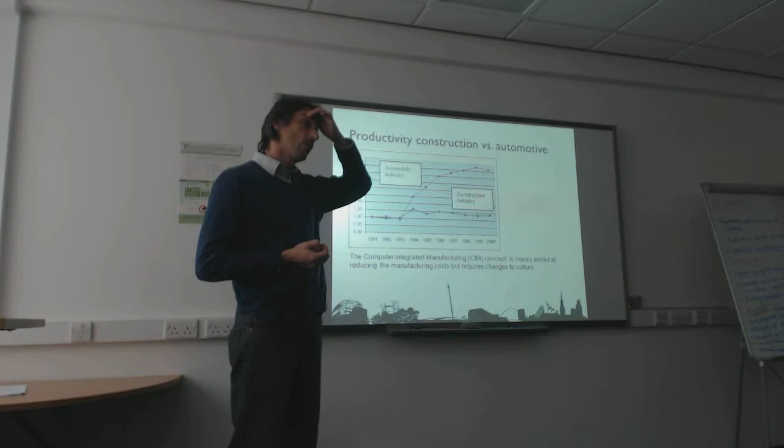This is a chart comparing productivity rates for two different industries. Construction is the blue line, and automotive is purple-pink.

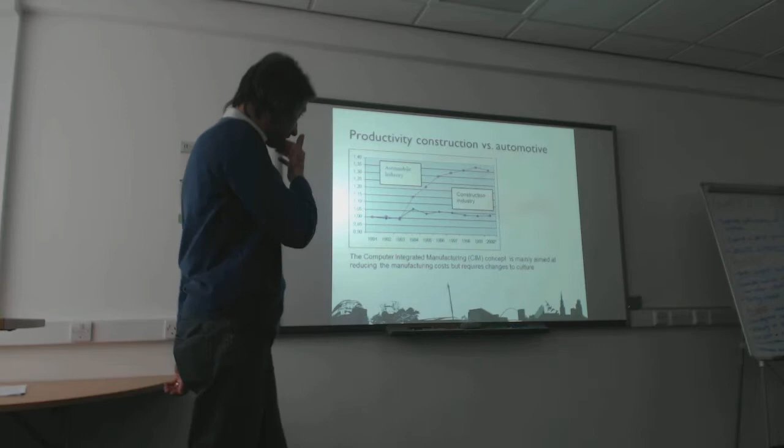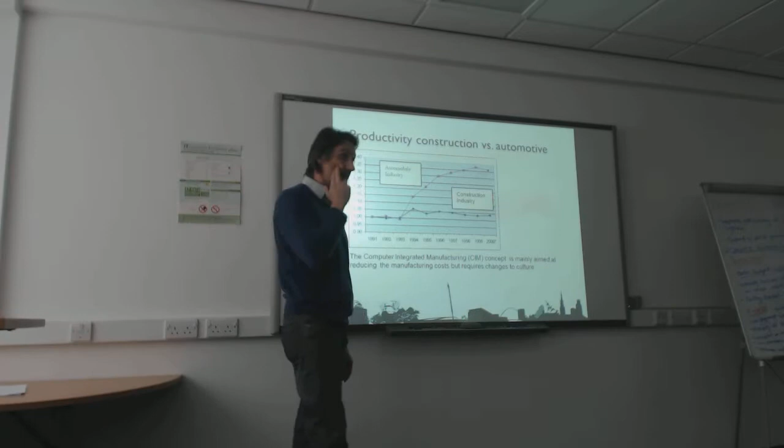At some point in the mid-90s, the automotive production industry just changed gear. They embraced robotics for good. They reduced and analyzed very carefully whatever could be done in streamlining and improving the productivity of their manufacturing lines. You have probably done something about that with Eric, I suppose.

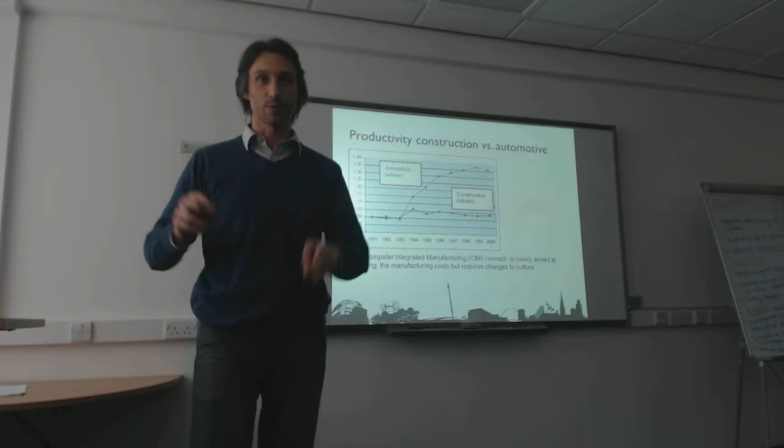Eric would say that 99% of this is associated with lean construction, with lean methods. My view is that there is at least another big contributor to that, which is actually huge efforts in automating processes that could be automated.

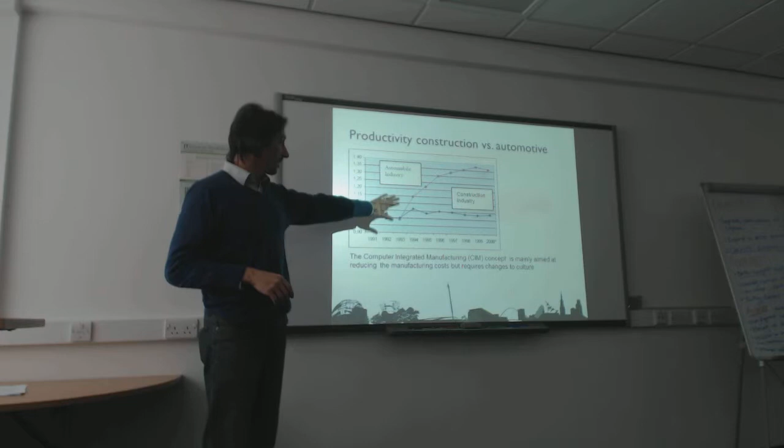Probably better done with... it would probably be better improved with modular design, or—say again, sorry? It would probably be better improved if they started with more modular design, you know. Yeah, as well. I mean, all sorts, and this can be done fairly easily.

Will I survive this lecture, or will I die here in front of you?

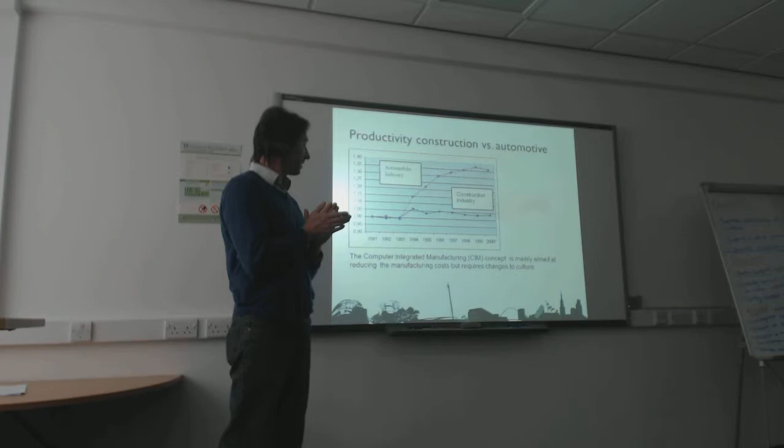Sorry. So the automotive industry could invest substantial amounts of money in improving the processes of delivering cars, because there were just a few competitors competing against each other.

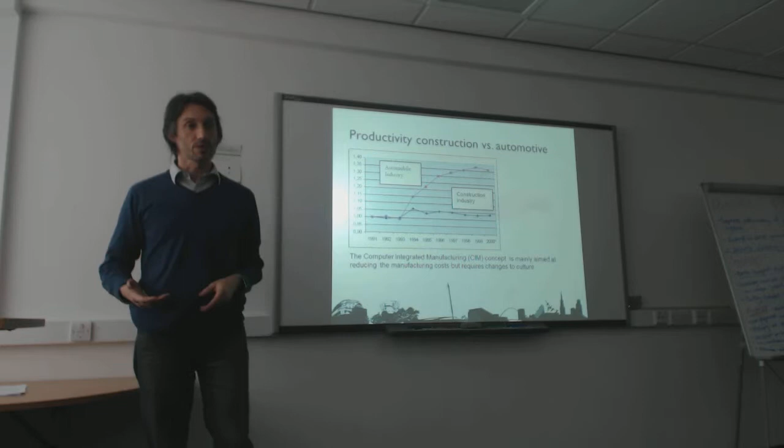The construction industry is much more fragmented, so we haven't been able to identify and improve on the integration and modularization of design to the same extent, because the interests are much more dispersed in our industry. But let's see what we have done.

We have used computers to aid construction in a number of areas. We use computers massively to improve our design processes. We have all mentioned building information modeling. We are at the early stages of the BIM revolution, but it's impacting seriously.

Planning, yes, we do some planning with automation and computer support. We have all sorts of planning activities, and small levels of automation are creeping in.

Supplier relationships—the information flows for supplier relationships are automated in some sort. They are digitalized, of course. They are not automated in the sense that we are still to improve the ways in which we come to decision making in that area, but it's coming up.

In the production stages, instead, there is very little uptake of these potential technologies. We have seen a little prefabrication, pointing to modular design and modular behaviors to improve productivity. The erection of buildings is mostly done by humans.

You have humans controlling all aspects of it. People assemble stuff, people dismount stuff. We have machines to help with dealing with the huge forces that we deal with—we have cranes, we have these kinds of things—but they're not automated, they're controlled by humans. So the target we are aiming at is full on-site automation.

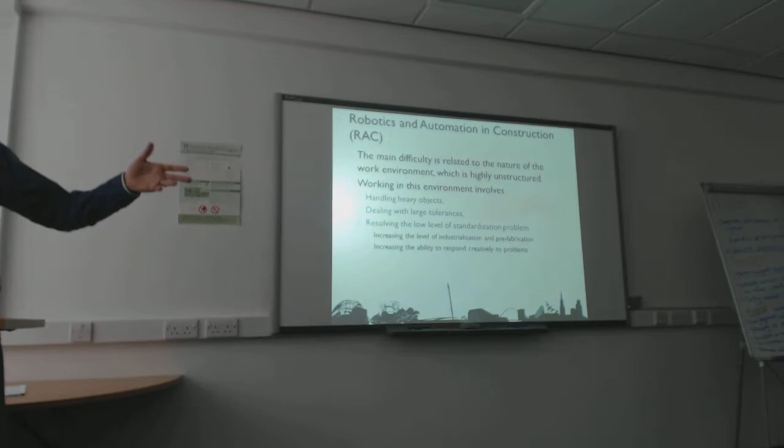There are two ways you can deal with this: either by increasing the level of industrialization and prefabrication that we use in our design and in the definition of our models, or increasing the ability we have in terms of automation to respond creatively to problems—adapting the behaviors of robots and machines to the configuration they find locally once they come to site. So you have only two ways.

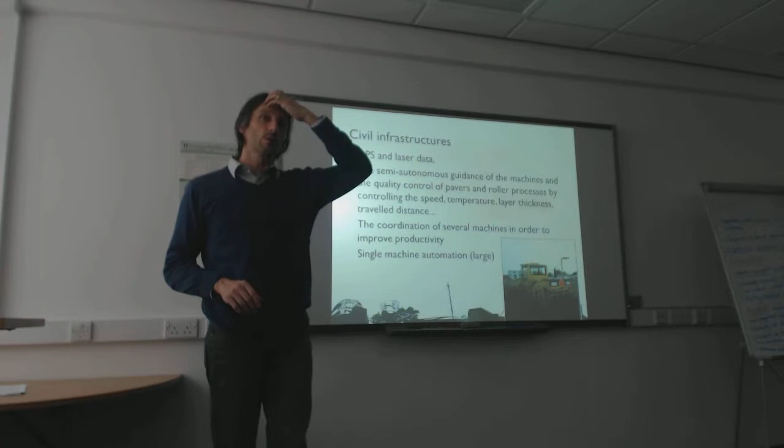Nevertheless, something has been done already. Thanks to GPS and laser data acquisition on site, pavers and rollers like this can be completely automated. This was actually a completely automated roller with a GPS antenna on it. You put it at the end of the track and it starts moving up and down until when?

Until other sensors tell it that the quality of the pavement has reached desired targets. This seems trivial, but it's a big step. You don't have an operator evaluating with more or less care the amount of work that has been done—you have a machine that works and goes on performing a task until it reaches some level of quality. So you can incorporate a quality target in the behavior of these machines.

There will be laser sensors that check speed, temperature, layer thickness, traveling distance, and smoothness of the surface through laser scanning, to detect whether they need another passage at a specific area or not.

This also proved to be a good field of research because these machines can be helpful, but they work in collaboration with others. By studying carefully what is the best sequence of operation and the best behavior they can play together, you can improve efficiency in the delivery of road construction. But that takes cooperation between machines—a big picture of what activities to perform, in what order, in what timing sequences, and then sequencing. You have to have communication and information channels that exchange data between these machines so they can agree on behaviors to be performed.

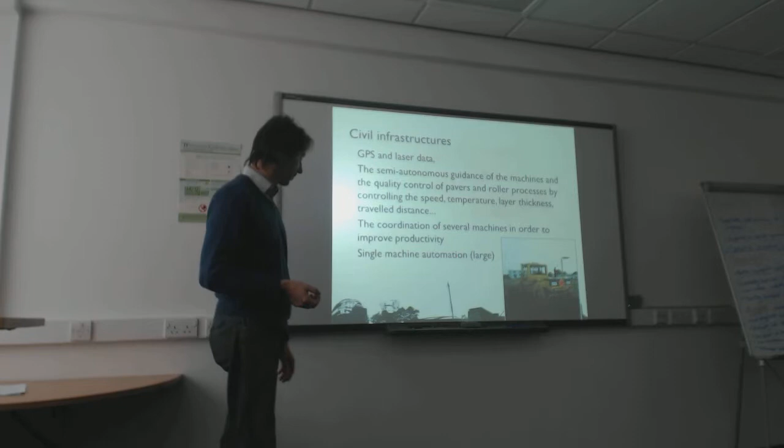Another situation where this was possible was the automation of single large machines—digging, for instance. Many operations inside these large machines are completely automated, because once you have things like this, or this, you bring the factory to the site. They are so huge that they can transform any site into a streamlined process. You have the digger here, and all sorts of automation inside the body of the machine to transfer the materials, analyze them, sort them, and divide channels—bringing a factory basically to the problem rather than dealing with it a step at a time.

So this was done in the past with large tasks, but we're now observing a trend bringing these automation behaviors to small tasks. Automated excavators are being trialed now—I haven't seen anything on site already, but excavators are fairly dangerous objects to have moving around independently. So they are carefully developing their ability to decide the best set of actions to move land or dig a trench, and things like that. But it's fairly easily done in terms of data.

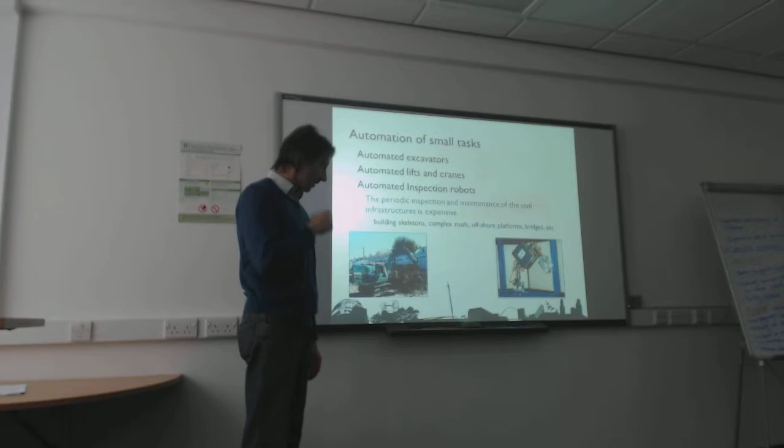Automated inspection robots also. Large civil infrastructures—a bridge, a marine, an offshore plant, things like that—are now full of small machines like this that move and walk across the structure with sensors on, scanning all the relevant portions for bolts, for rust, and things like that to check whether everything is as expected.

Maintenance and inspection of the status of expensive equipment used to be a very expensive task, but this level of automation is helping to bring those costs down.

You have a question? Yeah, didn't Australia have the automated painting robot that they were testing on one of the bridges? There are plenty, yes. There are plenty of tools.

But if you have a fairly controlled environment, so you know what the task is, you have a pretty good picture of the problem at hand, you have an extremely detailed model of the bridge. Well, it's not terribly complicated to think of a small robot that performs a single task extremely efficiently.

And possibly you could integrate that with things like this, that don't just paint over the whole bridge—because we need to do that anyway—but just go around and check for problems and fix them. Once you have this level of ability to routinely do things cheaply, you can change the plan of your maintenance.

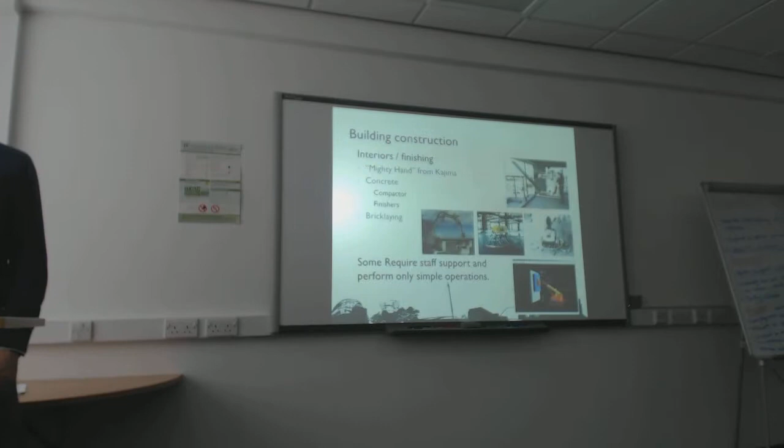Larger robots are also in use. We have robots now to install windows with a single operator. It comes down, you press the button, the robot will react in real time to forces of the wind and things like that, and progress to the next step of installation when conditions are met.

We've always had cranes—that's not the issue. The issue is that these machines have started to have intelligence on board, starting to make decisions about what is the best course of action to get that window installed in different environmental situations.

So we also have concrete compactors and finishers that you unleash on a floor, and they will go on and do what's needed until the floor is perfectly level—or, coming back to this previous idea, until the floor is leveled to the agreed standard of quality. Sensors, feedback.

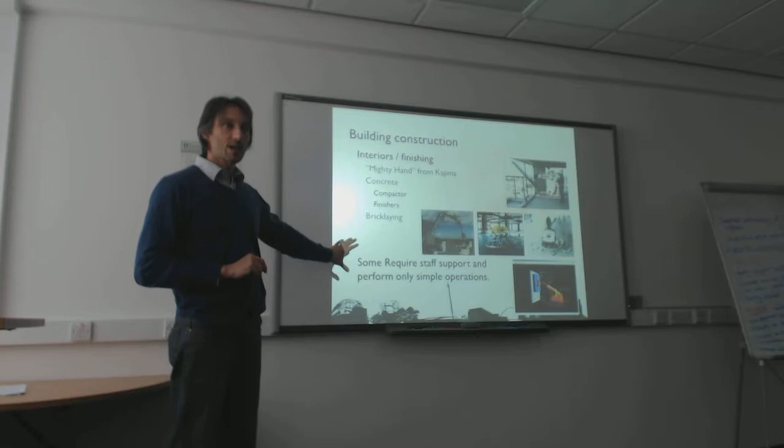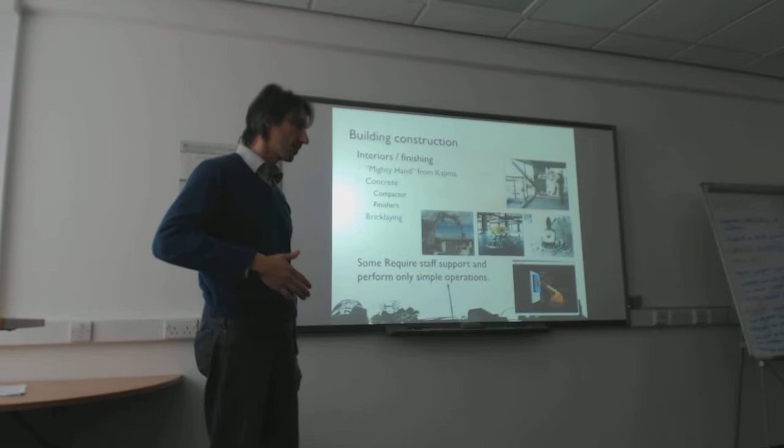We have robots that lay bricks for us. The point is that most of these tasks still rely on staff being around. These are not fully automated things. They could be fully automated, but they still need supervision for health and safety reasons and a number of other considerations. And they are generally very verticalized, very specialized to deal with quite narrow areas of problems that can be sorted by them.

So this active security is one of the first areas of enhancement of information flows on a construction site. But we can also think of having semi-clever equipment to support workers further.

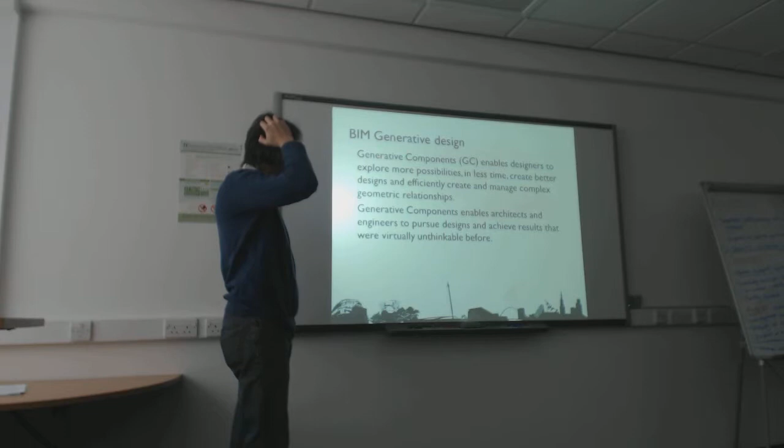Other areas in which innovation is coming to us is the area of generative design. In the past, you've probably considered that designers will solve all sorts of issues, right? I'm an architect, I will take care of each room individually, and then carefully define how a technical solution will support a design objective, and carefully look at all the ways this technical solution interacts with all the other elements of my construction stage.

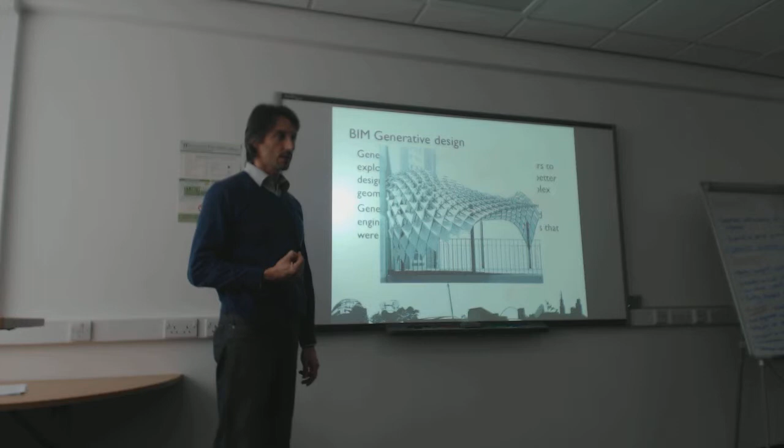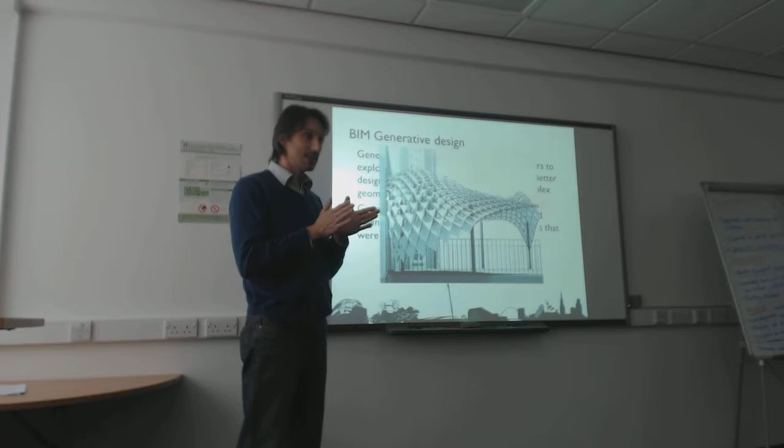But of course, if you are to design a canopy like that, that can take a lot of time, right? And of course, well, no problem, we have plenty of money available in the construction industry, right? No. Only exceptional projects have plenty of money, most projects are tight on budgets. So why would you have somebody measure and detail the size of all these different items carefully and how they interact with each other?

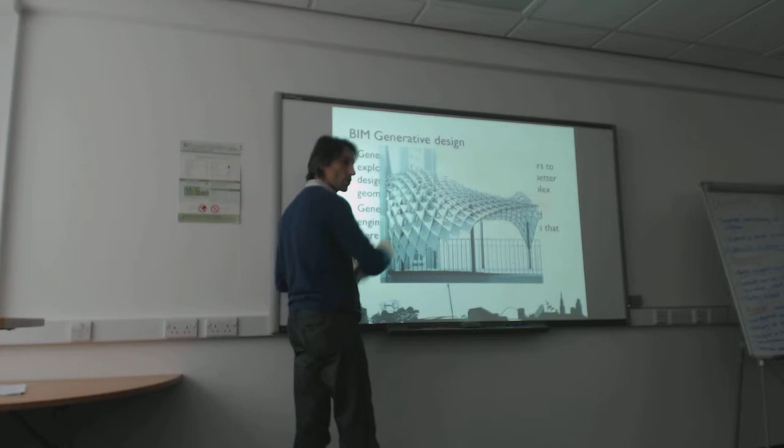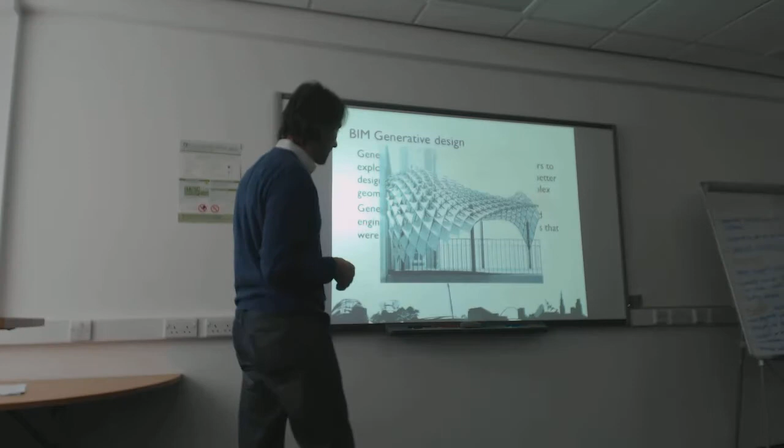You won't. The only solution, if you really want to build something like that, is to have an automated algorithm decide on basic functions - larger items here, smaller items there, a gradient of dimensions - and then have a little algorithm decide what is the best shape of the specific element. On top of that, you have to be able to produce these different elements. So the next step is to transfer this information to the computer-aided manufacturing industry, so files are exported from these models directly to the equipment that cuts the different pieces of material to the exact shape, and compute all the elements that are needed. So computers have also unique abilities.

Different results for architects, if you want to build something beautiful, you can call Michelangelo and ask him to paint your ceilings. But in some other situations, you don't have that amount of money. Maybe you can still do complex stuff by automating them in such a way that they become cheap. So if you have access for a couple of weeks to an item like that, you can think of a whole facade of a large building where every brick is laid out according to a generative pattern in a very precisely determined position, so that these walls or prefabricated solutions are custom designed, stacked, and each individually designed and built, stacked and shipped to site for final installation.

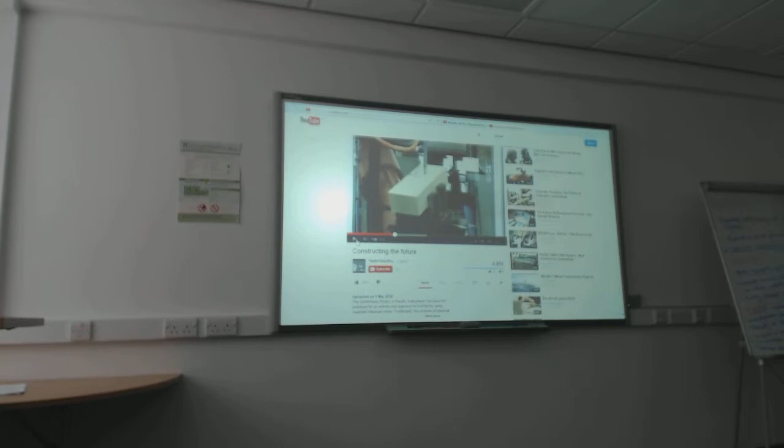What it's doing now is putting some glue or concrete on these bricks, but not on all the surface. It's putting that only on those areas where this brick will be touching other bricks. Everything else is perfectly clean. So every single gesture that these things do is very carefully controlled.

It's not just one of those large-scale automation processes that you see in industry. So there are unique abilities that these machines have. Let's try and think of ways to exploit them. Anything else? Yeah, well, some of them fly.

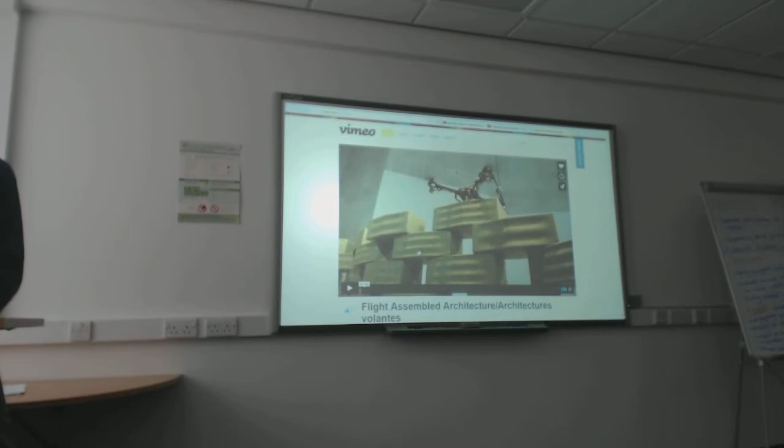This is a bit unrealistic. Have you seen this in the past in the general media? What is it? These are quadcopters. Amazon? No, before that, a couple of years before.

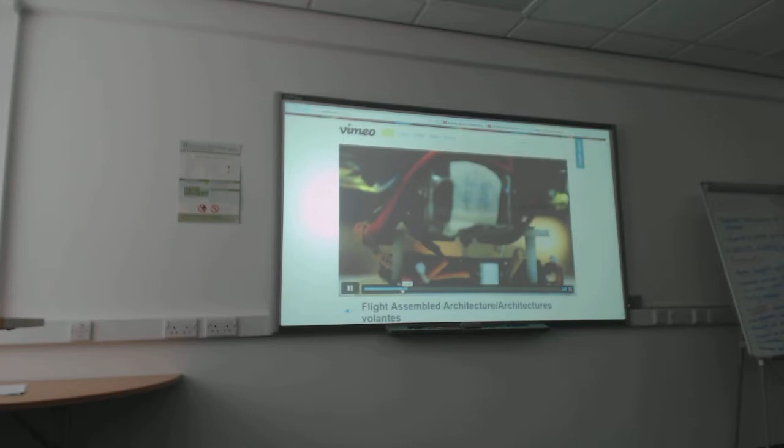Quadcopters would pick up a brick and go on a specific side and drop it down, but carefully think whether it is in the right place. A little correction, and it's laid down. Then another quadcopter starts and picks up a new brick and lifts it off. There you go - must be polystyrene or something like that. These are very light bricks, of course.

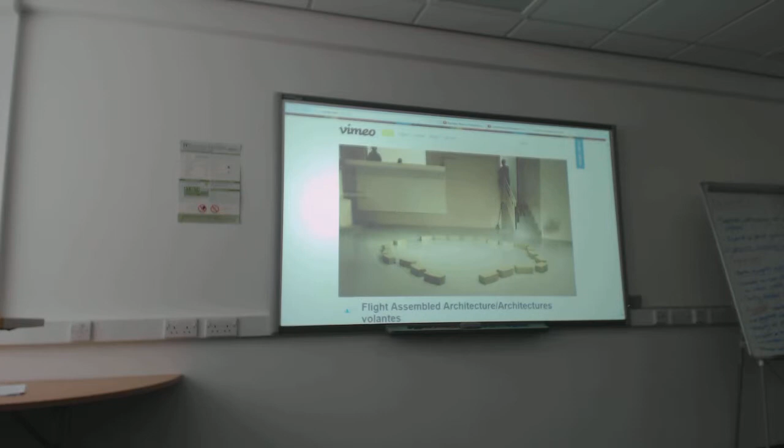Pretty good. Give it enough time, they build the whole structure. You give a generative design, and they build the whole structure.

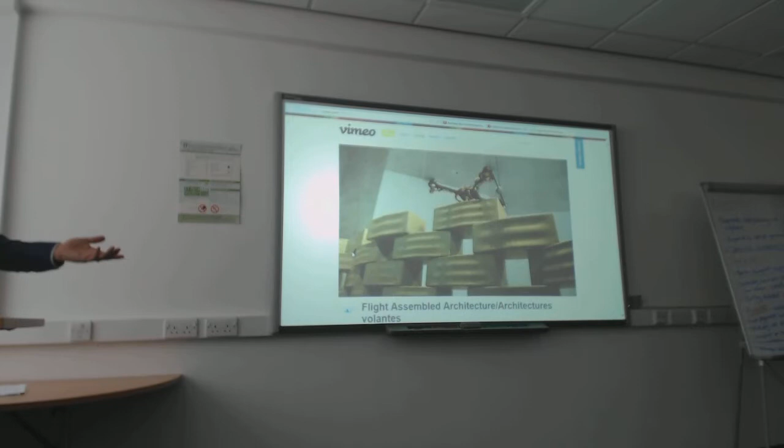Now, this was absolutely a marketing stunt, right? I want to make this clear. There is no real innovation here, other than the demonstrated ability that we have to control swarms of elements - multiple robots interacting together for a scope. That's the bit I wanted to highlight. Of course there is no current need to have robots that are flying to carry these things. But robots on wheels would be probably just as good. They just make less marketing effect.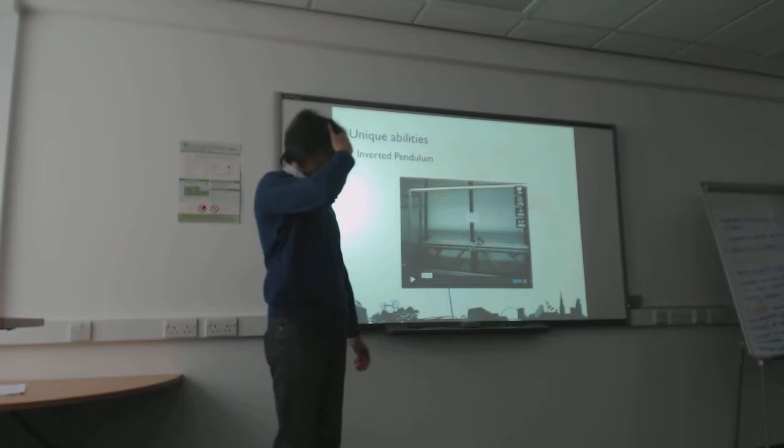So, are there other unique abilities that we can exploit from robots? And there are. How many of you are familiar with this game - you put something on your finger and then you go balancing it, right? You stick it, balance it, and keep it upright. That's brilliant. And there are machines that can do that.

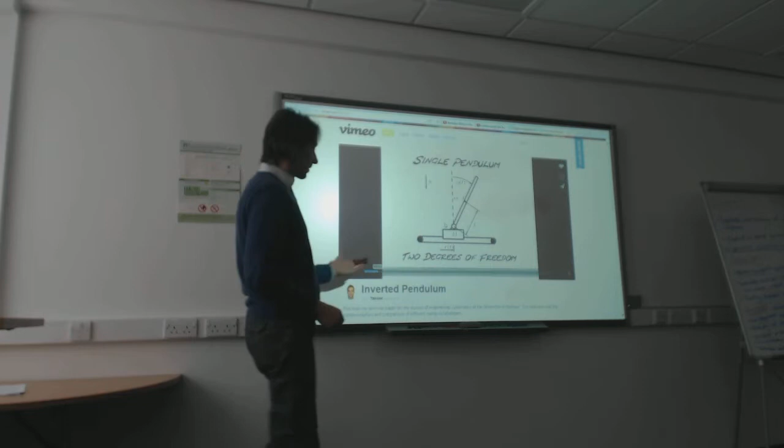This is a machine - music is really something here. So how do I show this? You have this pendulum, you can move something on one axis, right, and you want to keep it upright. So that's the machine. It can move in 2 directions, and there you go.

Brilliant. Now it looks like it's still, but it's not. It's micro moving to compensate for all those small forces - wind, whatever, somebody opening a door, a vibration on the floor that would make it fall. It's not just still, it's micromanaging the problem of keeping this pendulum still.

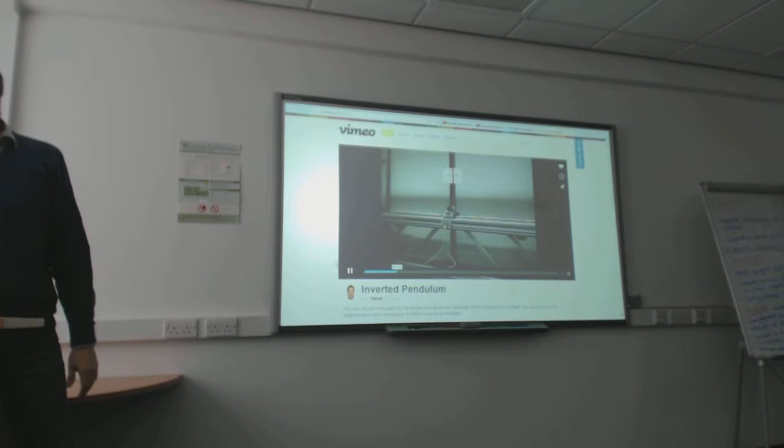Yeah, I mean, we can do that, that's easy. But, so as soon as you take power off, it falls, okay? Just to demonstrate that it was actually actively responding to the challenge.

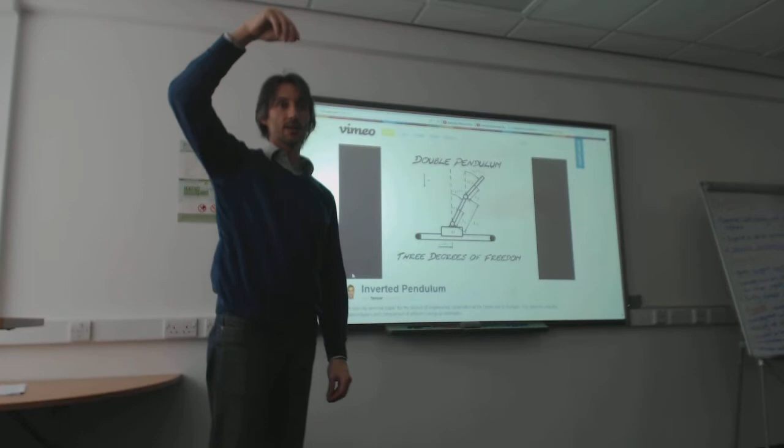Now think of a solution where the stick that you want to balance actually has a hinge in the center, right? So it's 2 sticks that have a hinge in the middle, and you still want to balance that. That's a more complicated task, right?

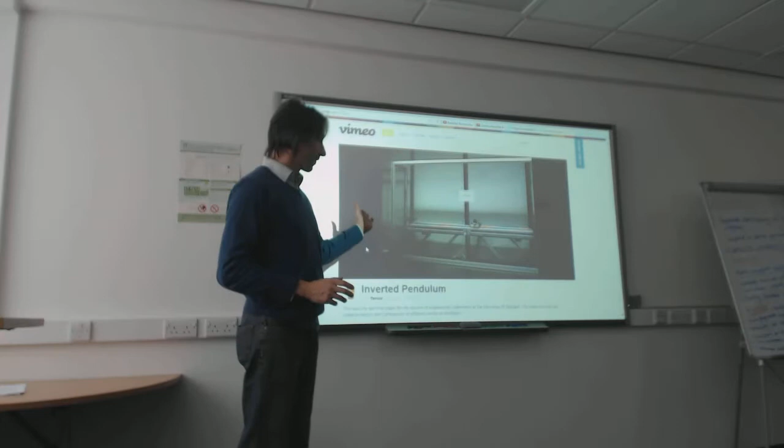So can a computer deal with that? Well, it can if it is programmed in such a way that will give to the system the right amount of energy to start with, and then start to regulate this apparently crazy movement so that...

It's still running the same software. It's going, no, I want to keep this upright. Sorry, no, it doesn't matter if you push - I can react so fast that the thing will not fall. It's gonna happen.

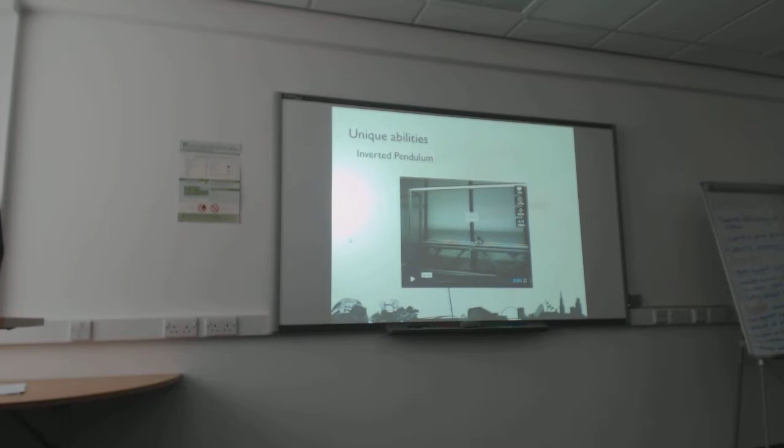These things will have features that we can only dream about. So it's worth starting to think of the construction industry, for how complex the environment we are playing in is, as a place where unique abilities - speed, strength, intelligence - can provide a substantial change.

This will need a serious rethinking of all the information processes and information exchanges. Of course, in the short term, you can start thinking about: okay, I need to move that table to that door, I need to install that door, I need to paint the ceiling, whatever it is they need to do. At the beginning, the information flow needed will be very simple: geometries, location, tasks, forces, materials.

Where are they? How do I pick them up? What is the equipment that I need? These are the very basic questions that we need to deal with in these early stages. But eventually, in the long term, I can envision a situation when I go to an artificial intelligence and tell it: yeah, I bought this land in Tuscany.

I need to go there with my family. How many of you are there? 24, it's a large family. And they will go, fine.

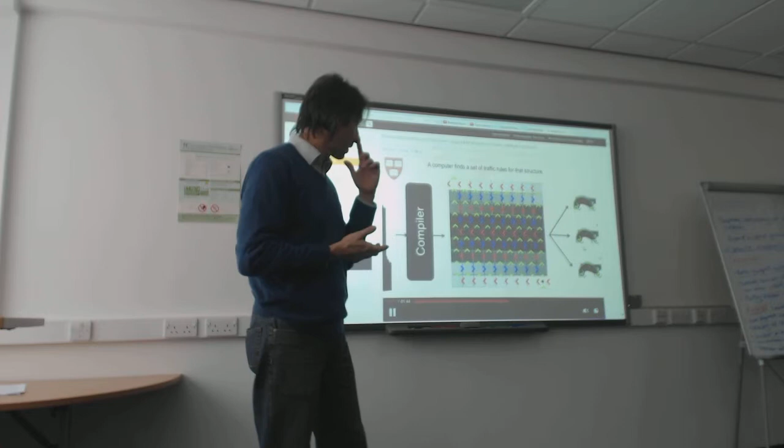They try to mimic this behavior, so each robot is given a very short amount of information that is mostly interaction rules — how do these robots need to interact with people, how do these robots need to interact with each other? Once you give them these rules, they end up building — this is a simulation of that — the structure that you designed. So you start from a design and transform that, not into individual tasks, but into generic rules that, if applied consistently by a large number of robots, realize a complex infrastructure.

Wow. So the type of information that flows in these things is substantially different.

And I want to go back to my lecture.

So one of the tasks of engineering — the basic solution most people think of is: we know the industry will never change, so one solution would be to just replace humans with robots that are shaped like humans and have the same abilities, and let them do the hard work. That's it, and we are on the right track.

You have all seen robots running, right? At least recently — how many of you have seen robots run? So you can push them and they won't fall, and people think, yeah fine, you push it, it won't fall, no big deal, right? Except, well, we achieved this 3, 4, 5 years ago.

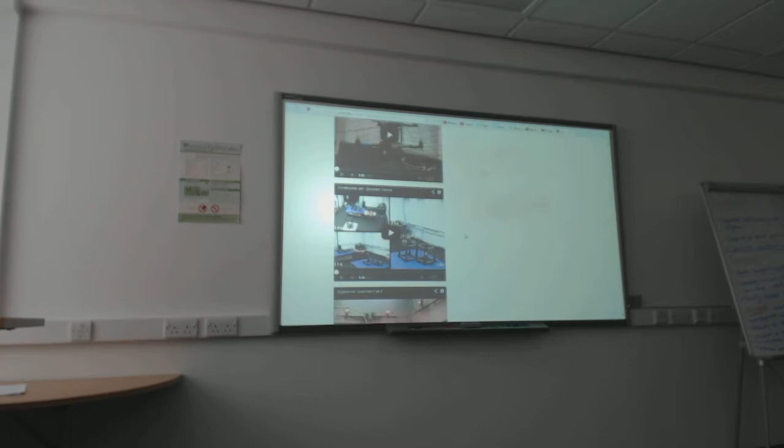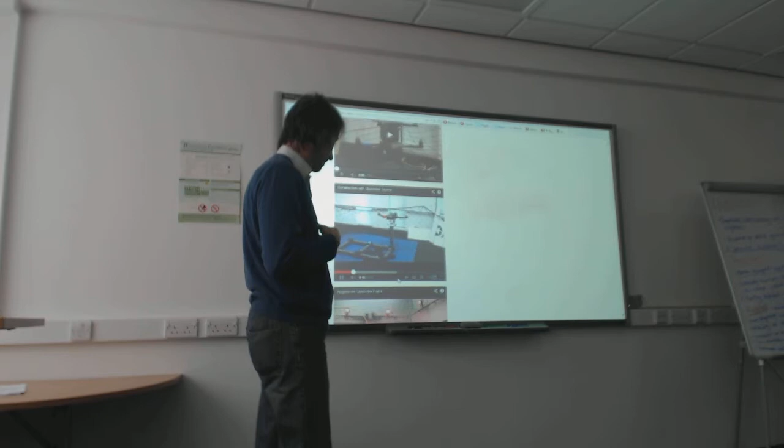This is an image of another set of teams of quadrotors to autonomously build cubic structures using quadcopters. Very fancy quadcopters. If you're doing anything with robots, you better do it with quadcopters so they'll be all over the web. But the big question these people were facing is: we have a design, we give you a number of items, then you sort out the best sequencing to actually install the structure. So these robots are not following precise instructions, they have generic, high-level aims. This is the target design, these are the items, you sort it out. So several robots negotiated between themselves the activities that each one would activate to install an item.

So, I mean, they are cumbersome, of course, but printers in the 60s and 80s were just as cumbersome. The first printer I ever bought was a so-called Margherita - it was like an old typewriter, except automated. And I'm not that old. I am old, but I'm not dying yet. So we've made a lot of progress, and more progress is coming soon. Trust me on that, because...

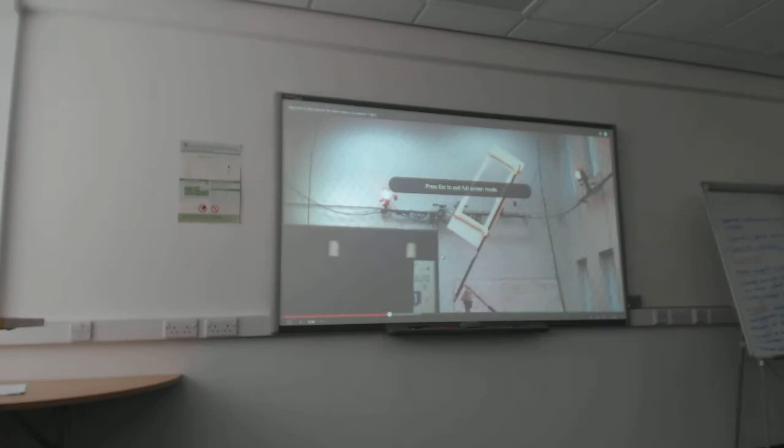All of these videos, you should watch all of them, they are amazing. This video presents autonomous control capabilities for a quadrotor helicopter. We use a 20-camera Vicon system and an onboard IMU for state estimation. Here we show single, double, and triple flips. We developed a method for flying to any position in space with any reasonable velocity or pitching. We use the method to fly through windows at various angles - here there's less than 3 inches of clearance on all sides of the quadrotor. Automation in construction is coming. It can fly between other quadrotors. When it's coming is the next question. The same method can be used to descend or ascend through a horizontal slot.

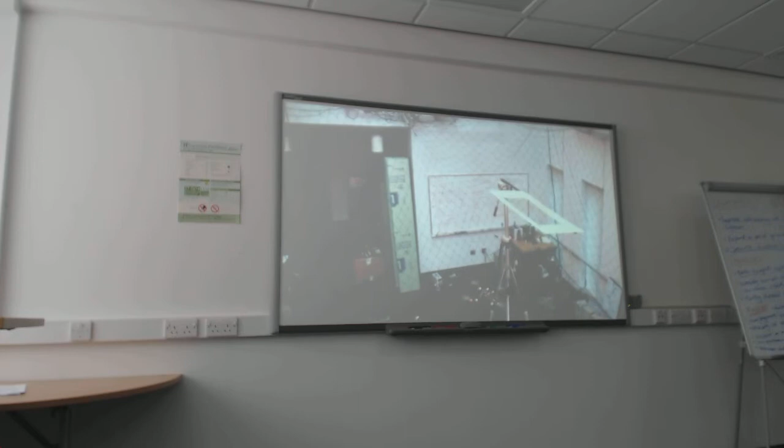Anyway, I wouldn't like to have anything like that following me with a gun. Drones.

But more realistically, contour crafting is here. You spit out a bit of concrete, you wait for it to consolidate, you go over it again, and you have built a house. Are they doing it at big scale? Yes, they are doing it on a large scale. I'll point you to the links, but this is the nicest video that I've found, so there you go.

Of course you have issues, because buildings will also have walls and things will have all sorts of integration of systems in them. You need pipework, you need electronics, you need all sorts of ducts, you need structural elements, but these are all things that can be taken care of. What else?

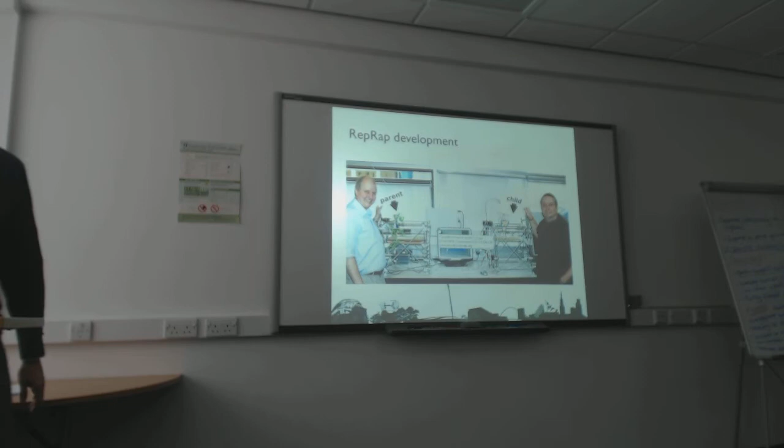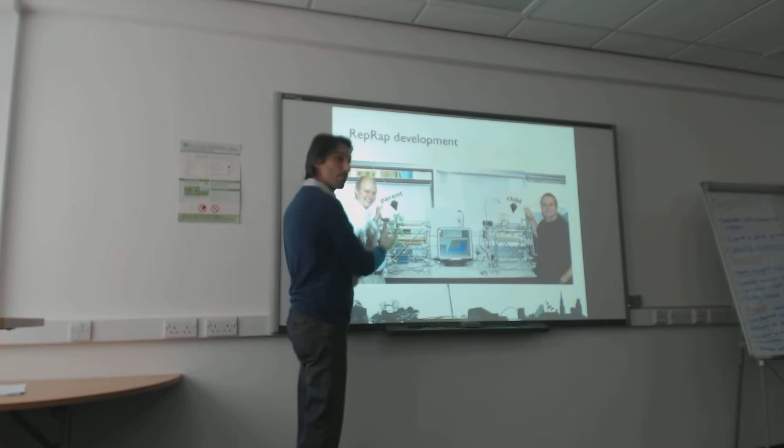So this is a printer, a 3D printer developed at Bath University. With this, they printed this - they didn't print all of it, they printed the initial plastic bits that allow people to assemble this. So you still have to buy the steel rods, you have to buy the electronic equipment separately. But the long-term aim of the RepRap project is to design a printer that is capable of printing all the items for another printer like itself.

If you ask a biologist what life is, they will tell you it is the ability to self-reproduce. Then they saw this and said, oh, maybe it's not. So current research is really challenging the boundaries of our understanding of the whole universe. This has made biologists think and rework their definition of life.